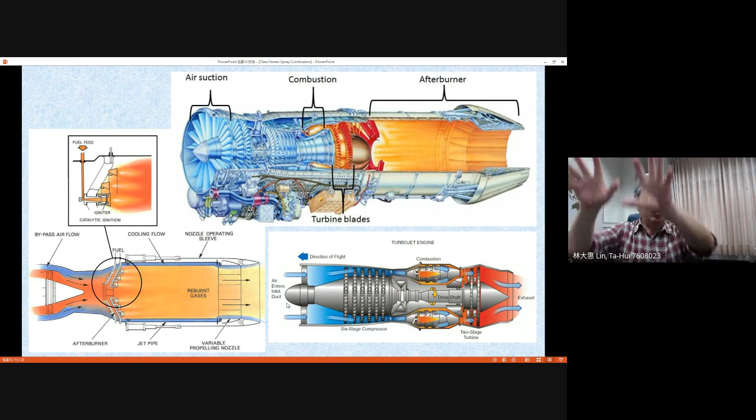Now you have oxygen, but you need to supply additional fuel. For the afterburner, there is another fuel supply line that delivers liquid fuel into several small burners, and this burner arrangement provides burning downstream of your nozzle. This produces combustion behavior, releasing a certain amount of heat. After that, there's additional energy coming out, and those burnt gases move out of the afterburner, providing additional thrust to accelerate the aircraft.

This is a typical arrangement for the afterburner. You can see several afterburner sections arranged connected together, and the burning in the afterburner follows the premix burning I already explained.

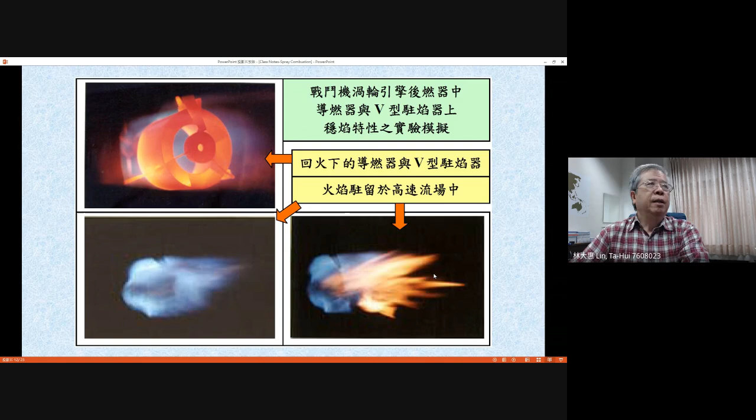Now let's go back to look at the older structure for a gas turbine used in aircraft. You can see there is mainly a spray combustion in the combustion chamber, and later a spray flame in the afterburner. For the afterburner, you can see there should be very intense burning existing in this region.

Then you may wish to have more efficient premixing together. Usually the spray atomization will occur before they reach the afterburner, and we will have behavior more related to gaseous combustion in the afterburner. We call this the spray systems in the afterburner system. Actually, they're more related to spray atomization, and for the flames that exist in the afterburner, they do not have too many droplets. They are more purely modeled by the gaseous flame, gaseous turbulent flame, even premixed flame.

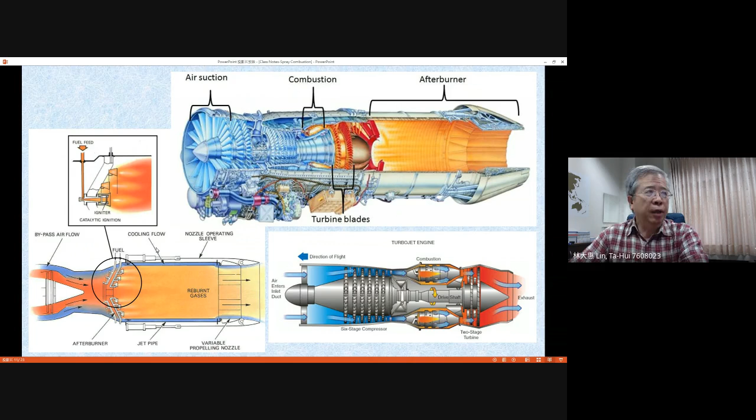For the stationary gas turbine, they have more stages because they only deliver a certain power to drive the compressor upstream, but most of the rest of the energy output will drive the electricity generator.

The most important thing I want to mention for the stationary gas turbine is that since they burn gas fuel or light fuel oil, you need some arrangement for the prevention of thermal NOx, because for the gas turbine combustor you need good mixing, and then the spray atomization has an optimal situation to produce many tiny droplets. That means the gasification and mixing reach an optimal situation. In this situation, the burning is very strong and temperature increases to a level higher than the threshold for thermal NOx formation. Therefore, some designs to prevent this enhancement of thermal NOx are required for gas turbine combustion.

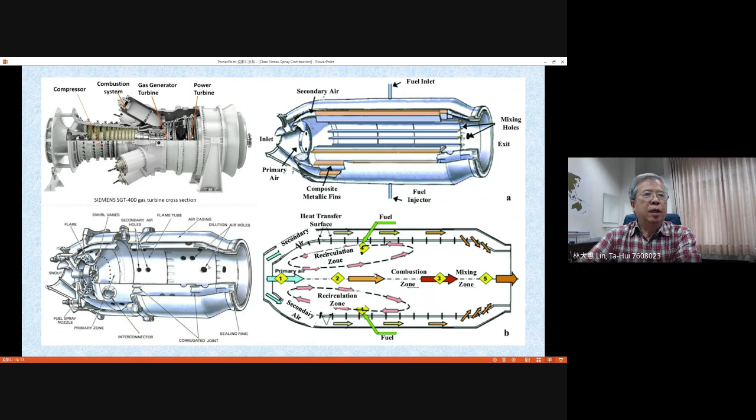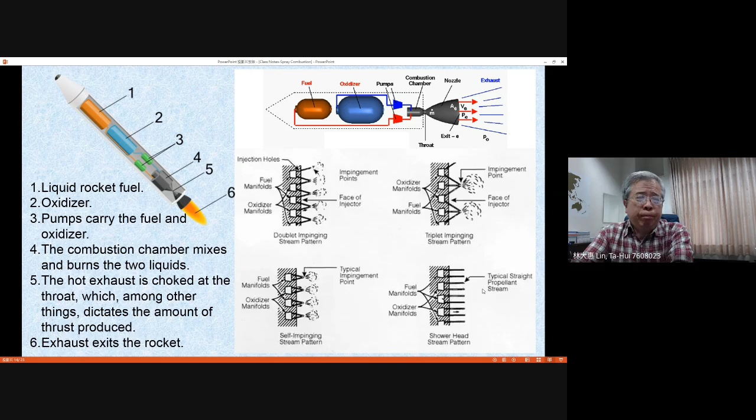This is a typical structure for spray atomization in a liquid rocket engine. With this kind of arrangement, good atomization and good mixing of the liquid fuel and liquid oxidizer is the main purpose. When you have this kind of good atomization and good mixing, the later combustion process is more related to the spray premixed burning.

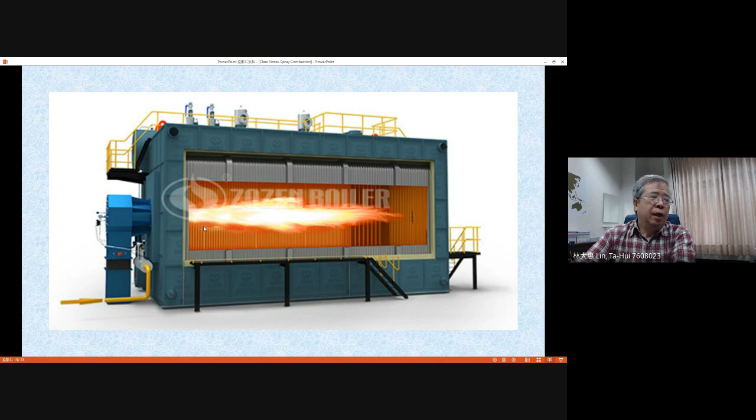Now this is a typical example of a spray diffusion flame you may see in an industrial furnace. This industrial furnace is a smaller one; the length of the combustion chamber is not too long. By observation of this burning structure, you can see there is a very strong axial momentum injecting out, so the flame extends a longer distance without any change of flame shape in this region. The influence of natural convection is relatively weak for this combustion chamber. But generally, you can see this typical spray diffusion flame - the spray comes out and burns with the surrounding air, showing the diffusion shape with yellowish spray flames.

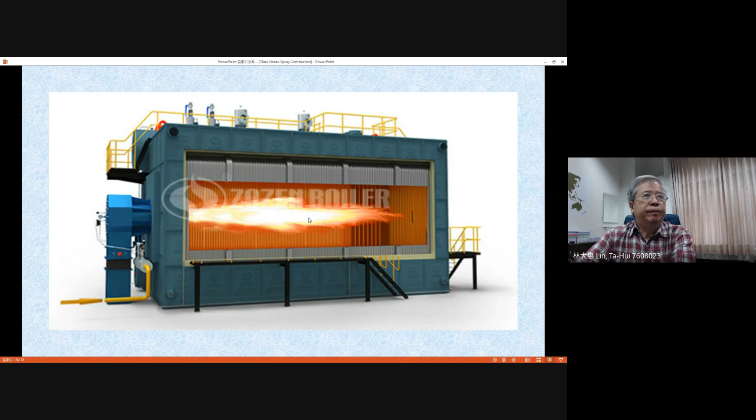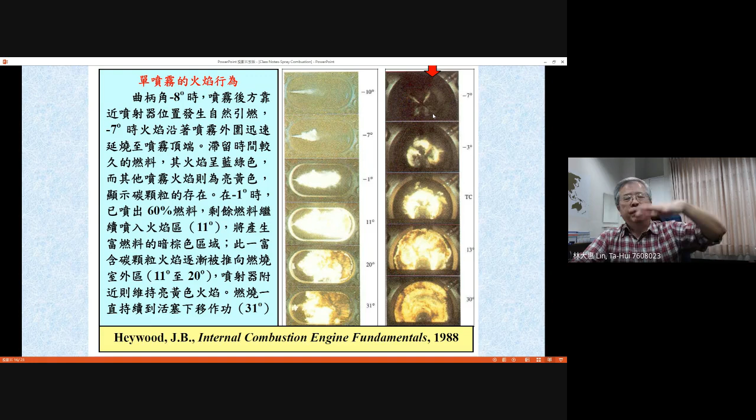This is shown on the right hand side. This series of pictures shows now you have 4 injectors, viewed from the top quartz windows. You can see the 4 injectors injecting out at -7 crank angle, before the top dead center, and later on they will ignite very easily.

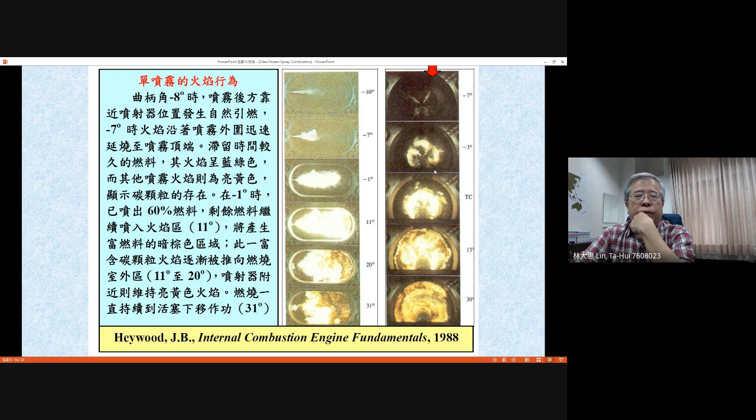But this frame is quite different from the previous one. The previous case was only a single jet without swirling, impinging directly into the combustion chamber. Here, the flame generates as the spray comes out, but the flame has motion accompanied by the swirling direction. This swirling motion effectively increases the mixing of combustion products with fresh air and liquid diesel droplets.

Then the combustion intensity and combustion process will be promoted. Near the top dead center, the spray flame ball almost covers a certain area, at least one third to half of the total combustion chamber.

Later on, the flame expands to the surface, to the boundary of your cylinder. Finally, the whole color changes to yellowish, and more dark regions occur, meaning they finish the whole chemical reaction, converting air and diesel fuel into products. These two series of pictures show you the spray burning in diesel spray.

Actually, the spray burning behavior, even the spray atomization behavior, is accompanied by time variation and also position. Therefore, when you analyze diesel spray burning, you need to consider the coordinates and also the time change. It is relatively difficult to simulate diesel spray burning because you need to consider the transient effect.